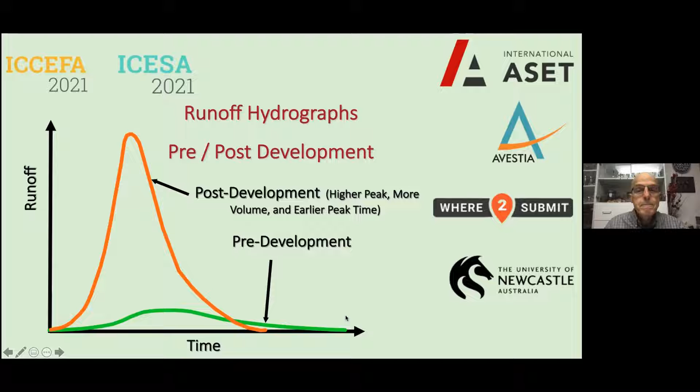In addition, the surface runoff contains wash-off pollutants. The rain isn't that dirty when it falls. There are some chemicals absorbed from the atmosphere, but there are wash-off pollutants that occur. Nutrients from leaves, grass clippings, tree flowers, etc. The cars driving on the roads all have metals, which they lose. When you hit your brakes, you lose a little bit of copper every time you hit your brakes.

When you run your tires over the road, you lose zinc, and as your tires wear, you lose copper. The chromium is on the cars. It comes off, and lead is a legacy pollutant. It's in the soil. It gets on the streets, and we wash it off. And so there are problems with water quality in impervious runoff. You also have petroleum hydrocarbons.

So one example here would be cyanobacteria, which is the cause of harmful algal blooms. Harmful algal blooms can kill your fish, can make your dog sick, even kill your dog, and can give you a pond, a lake, a river that looks really ugly. It's not attractive. So there are problems with nutrients and metals, pollutants in urban runoff.

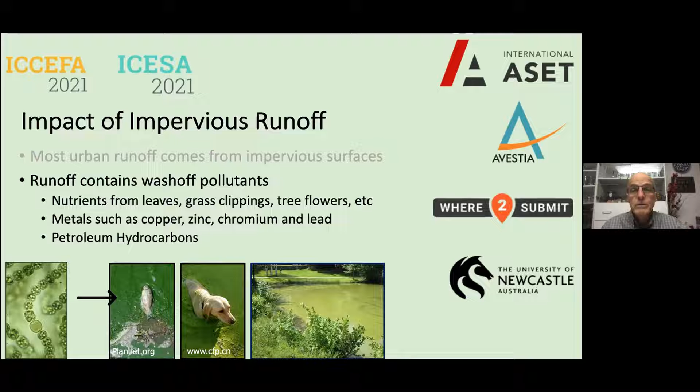And so then you have to get in and you have to make some changes to protect the banks, to do things so that it doesn't meander too much, things like that. And it becomes effort. You have to work at it.

Finally, there's the impact of combined sewer overflows. Most cities that were built over 100 years ago have combined sewers. That means you have sanitary sewer, and that has waste, human waste, and storm sewer together in one pipe.

When it rains, the runoff from the streets and the parking lots and the houses comes so quickly that the system cannot handle that. So you have backup. It backs up into your basements. It backs up into the streets. This is combined sewer overflow.

You can see some of the trash here, which is not the type of trash that you get with surface runoff. This is the type of trash that you have with combined sewers. So you have combined sewer flowing over into the streets, into basements, underground structures. That is not a good thing for human health.

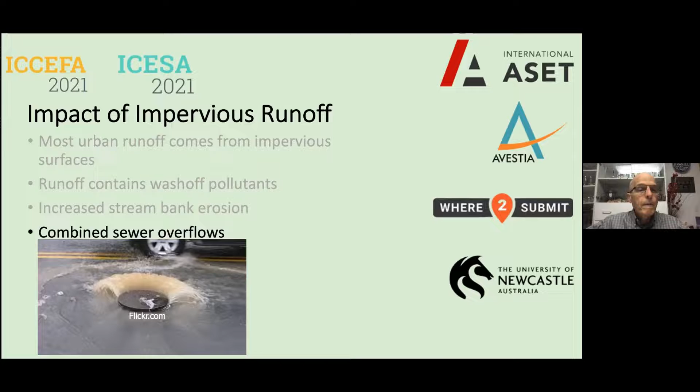So I'd like to shift a little bit and go to the evolution of stormwater technology. The reason is that every region has its own terminology. These are not exactly equivalent, but they're pretty close. So in the United Kingdom, they have sustainable urban drainage systems, and these are stormwater systems that drain the water and do it sustainably. So that would be infiltration basins, filtration basins, ponds, all these things are sustainable urban drainage systems.

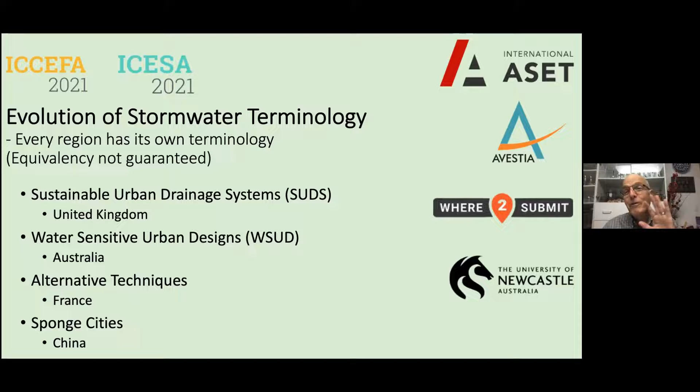In Australia, they developed a term for a similar type item, but they call it water sensitive urban designs, or WSUD. In France, they call these alternative techniques. In China, they call them sponge cities. Sponge cities is primarily about infiltration practices, which is similar to low impact development in the United States. Now in the United States, we can't have one term. We have 5 terms in the United States.

We started off with stormwater best management practices, or BMPs. That's all infrastructure used to treat quantity and quality of stormwater. Now, the problem with BMPs is that it is a management term. It's not a stormwater term. It's not an engineering term. It's a management term. So there are lots of BMPs in the world because management of the world economy is basically how the economy runs. So they developed low impact development, which is primarily evapotranspiration and infiltration, similar to sponge cities.

In 2008, the National Research Council got together and said, well, BMPs isn't that good of a term. So they started calling it stormwater control measures, or SCMs. Now, most academics are now calling it SCMs, but most practitioners are still talking about BMPs. So we have a dichotomy of expressions.

And then in 2012, the US EPA kind of seized on the term green infrastructure, and they related it to stormwater. So green infrastructure was originally related to stormwater, but it's become an ecological framework for social, economic, and environmental health. So it's kind of a broad term. So we are starting to talk about green stormwater infrastructure. And that's what I'll be talking about. That will be stormwater infrastructure that relates to social, economic, and environmental health.

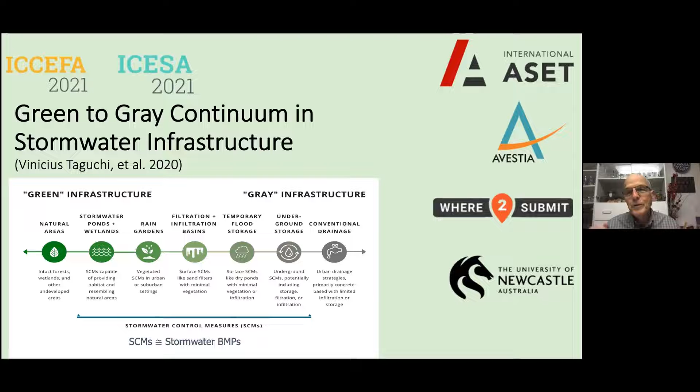And then on the far right, we have underground storage. Underground storage would be underground stormwater BMPs or SCMs, potentially storing water, infiltrating water. Permeable pavement would be underground storage because you're infiltrating the water into an underground area. So that would be the far right. And then finally, we have conventional drainage. So that's the green to gray infrastructure continuum that we have developed for stormwater.

So I would like to move on to the benefits, challenges, and solutions. First of infiltration, then of filtration, and finally we'll talk about benefits, challenges, and risk factors of pond storage. We don't have any solutions as of yet. I'd like to finish with some take-home messages. So what are the benefits of infiltration?

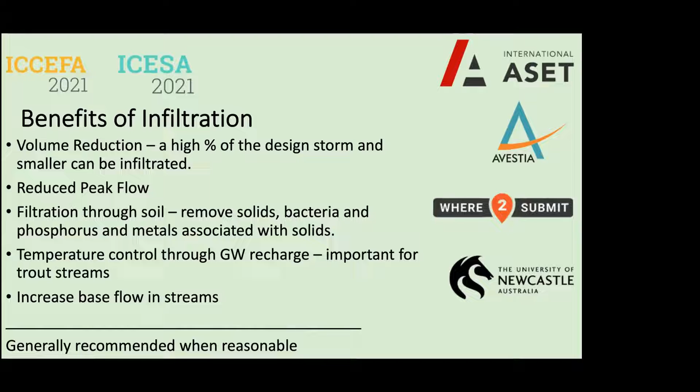Well, infiltration is where you take the water and you put it into the soil, just like it was in nature. So you're getting back towards the runoff, the hydrograph of your previous undeveloped state, the woods, the forest, the prairies. You're trying to get back to that. So you have volume reduction. A high percentage of the design storms and smaller can be infiltrated. You have reduced peak flow.

You have filtration through the soil. The soil will filter most of the solids, a lot of the dissolved contaminants as well. You have temperature control because you're recharging your groundwater and your interflow is much slower. That's important for trout streams. And then finally, you have an increase of base flow, not of the flood flow or the peak flow in streams, but of the base flow.

In some urban streams these days, we have streams that go dry in the summer because we don't have any groundwater flow anymore. We don't have any base flow anymore. And that's a stream that is not a habitat for things like fish, clams. And so we need to get some base flow back into those streams. Infiltration will help that. So infiltration practices are generally recommended when reasonable. Reasonable means, can you infiltrate?

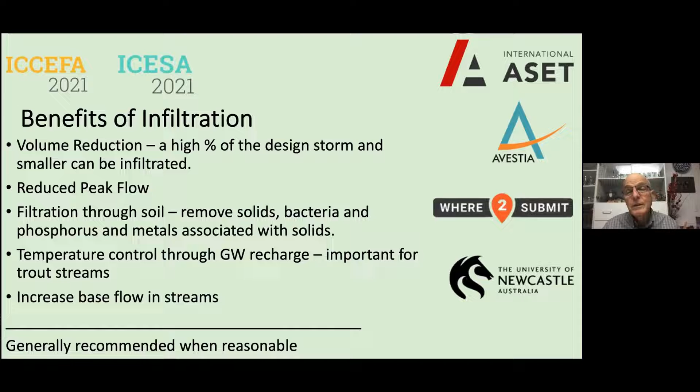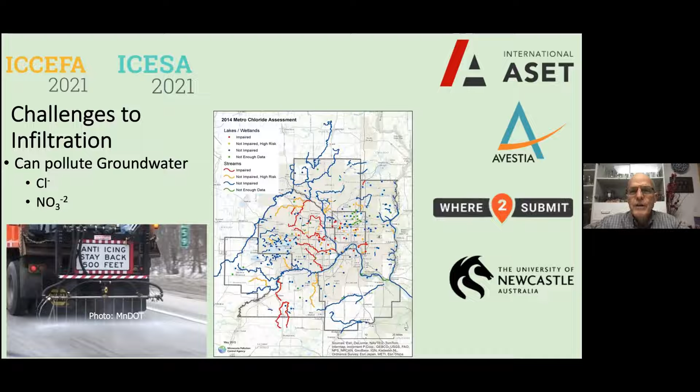There's also the possibility that nitrates will get through. Nitrate is not that significant in urban runoff. It is much more significant in the runoff from agriculture.

Another challenge to infiltration is that they don't always work. From day zero, about 30% of infiltration practices worldwide fail to function. The reason is because of the high spatial variability in infiltration. If you move a distance of about 1 meter, you can get a factor of 100 difference in your infiltration ability. So if you take one measurement of infiltration or one soil core, it tells you virtually nothing about the ability of a practice to infiltrate water.

So what we need is a lot of measurements. We need expertise in soil profiling. It's not easy to design an infiltration basin because you need to be a soil profiler and you need to have a lot of measurements. And then you need some statistics to make sense of those measurements. And you also need a different kind of excavation and grading. You can't just build an infiltration basin like you would a parking lot. One good way to decrease the infiltration significantly in an infiltration basin is to run a tractor over it with a front end loader, carrying some soil.

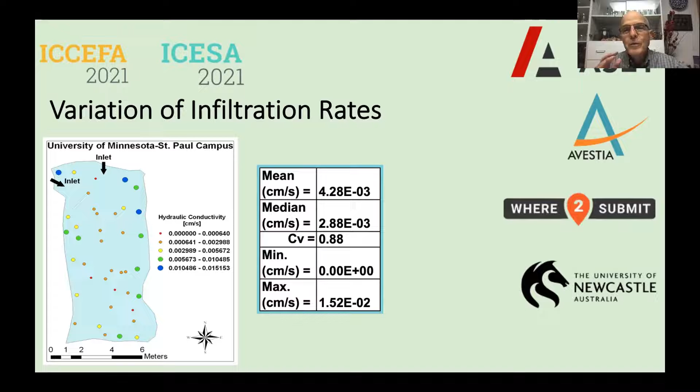You have to calculate the mean, calculate the median, and do the geometric mean. The geometric mean and the arithmetic mean between them will tell you how quickly the practice will infiltrate water.

So we used these devices to look at infiltration in drainage ditches, grass drainage ditches, which are basically grass swales. There's really no difference between them. A drainage ditch, if it's growing grass, it'll infiltrate water. And so we installed a bunch of these in here and measured infiltration rates. We found that these drainage ditches, or these swales, were very successful at infiltrating water, except where you have high groundwater. When you have high groundwater, it's difficult to infiltrate into the ground to empty the swale, just because the groundwater will hold you back.

But the main reason is that you have plants. They keep the pores open. And the plants require minimal maintenance. You have to mow it, and you have to clean up the trash. That's all you have to do. And you can go away and you can leave your swales, you can leave your infiltration basins, just mow it every now and then and clean up the trash. You don't have to do any other messing around with it.

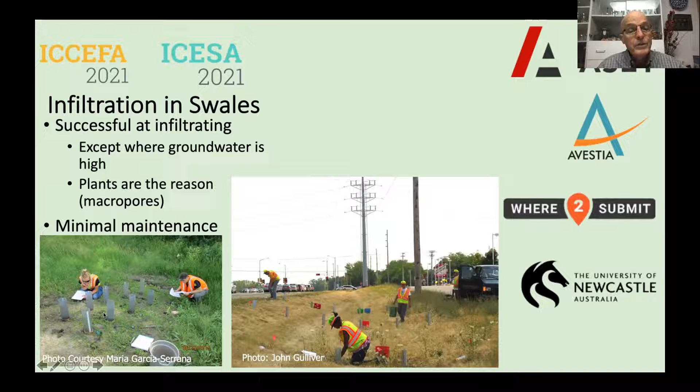Here in this swale, we measured 104 infiltration measurements. And this was a research project. We measured 104 infiltration measurements in a day and a half. Here we took 10 infiltration measurements in a very small section to determine what happens in this small section.

So here's an example of swales and the influence of plants. We have 4 swales next to different highways. What we did is we measured the soil texture. We took a soil core. We looked at the soil texture. We have a loam and a sandy loam, a loamy sand and a sandy loam, a loam and a sandy clay loam.

Now, there's something called the hydrologic soil group based upon the soil texture. The hydrologic soil group tells you if you have A soil, B soil, C soils, or D soils. The A has really good infiltration, that'd be the sand. The D has very poor infiltration, those would be the clays. And B and C are somewhere in between. In this case, we had a hydrologic soil group based on soil texture of B, not A, of B. We had 2 A soil textures and a C soil texture down here.

When we measured the saturated hydraulic conductivity, we took a lot of measurements. We measured how well the infiltration for the practice would be. We got fairly high infiltration rates. These are centimeters per hour. This is the saturated hydraulic conductivity, the most important parameter in infiltration. Anyway, we had 3.5 centimeters per hour, 5.7, 4.1. These are all A soils based upon the KSAT. We had 4 A soils, even though we should have had, based upon the soil texture, a B soil and a C soil. So these 4 A soils are the influence of the plants.

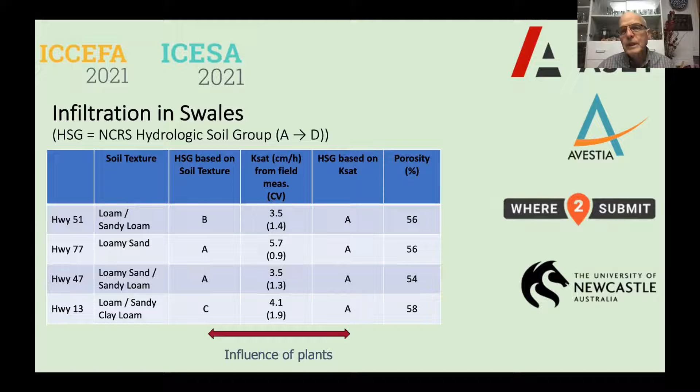So that's the benefits of infiltration practices. There are many benefits. The problem is that 30% of our infiltration practices, we build them, and 30% of them do not function from day one. That's a big problem. We need to take care of that problem. We need to get better at building infiltration practices.

So let's talk about the benefits of filtration practices. There are fewer benefits of filtration practices, but filtration practices filter water by improving the water quality.

And improve the water quality by filtering particles. One challenge is it doesn't have the multiple benefits of infiltration. It only has a small reduction in peak flow. It has no volume reduction. It has minimal temperature control, and the base flow in streams does not increase.

So filtration practices are ones where you filter the water, but you don't infiltrate it into the soil. You filter the water at a location where you cannot infiltrate because of wellhead protection or really tight soils. And so then you filter it and then put it back into the storm sewer or into your receiving water body.

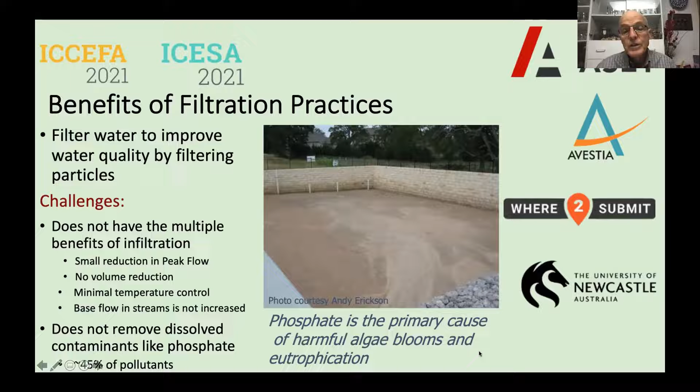And one problem is that filtration does not remove dissolved contaminants like phosphate. Roughly 45% of the pollutants are dissolved: the metals, the phosphorus, the nitrogen. Phosphate, for example, is a primary cause of harmful algal blooms and eutrophication. So it's something that we want to deal with.

So this is a partial solution to the phosphate retention problem. We developed an iron-enhanced sand filter to remove the dissolved phosphate in addition to the particles. Phosphate is the primary form of the dissolved phosphorus in the flow. So we put in 5 to 10% iron filings, 95 to 90% sand. The iron filings will oxidize, they'll basically rust, and then they'll capture the phosphate. A retention of 70 to 90% of the phosphate when designed and maintained properly is possible and actually feasible.

So this is what one looks like. This is a filtration basin. It's filled with water. It goes down through the iron enhanced sand into a drain tile and out into the storm sewer or the receiving water body.

We also have developed a compost amended sand to grow plants. The iron enhanced sand doesn't grow plants very well because the iron grabs all the phosphorus, and plants need phosphorus to grow. But if you put compost amended sand on top of the iron enhanced sand, it will grow the plants.

The problem is that compost releases phosphorus because it's decaying natural organic material. So the iron enhanced sand underneath it will capture the phosphorus released by the compost and the phosphorus in the water coming in to the rain garden. And then you have a gravel subbase and underdrain. It goes into the underdrain and out, similar to what we have above.

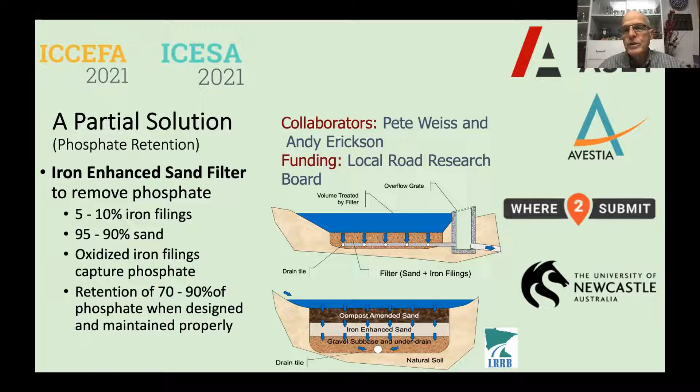There are 170 iron enhanced sand filtrations installed in the upper Midwest, and we feel very grateful for that. We feel that they are a good practice that will be moving throughout the world.

So let's move on to talk about stormwater ponds. Stormwater ponds are very successful in that they settle particulates and associated pollutants. They also convert dissolved phosphorus and dissolved nitrogen to particulate phosphorus and particulate nitrogen because the algae grows in the ponds. The algae grab dissolved phosphorus and turn it into particulate, organic phosphorus. And they provide a wildlife habitat, and they are seen as an amenity in many urban neighborhoods.

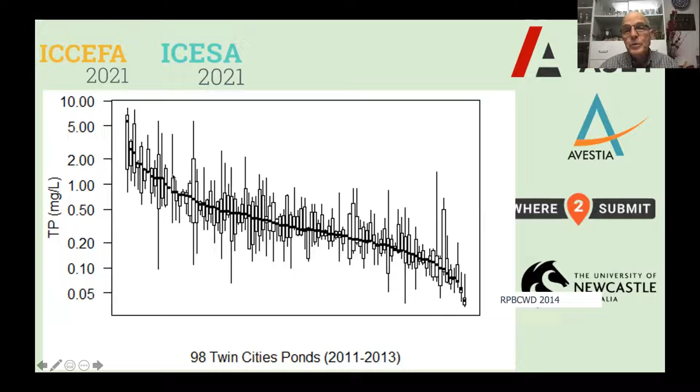Now, a pond should have lower phosphorus than what comes into it because what comes in typically settles, right? It settles in the pond, and so you have a phosphate concentration in the pond that's lower than the water coming in. We didn't think that this water coming in had 6 milligrams per liter. So let's take a look. And here's what we found.

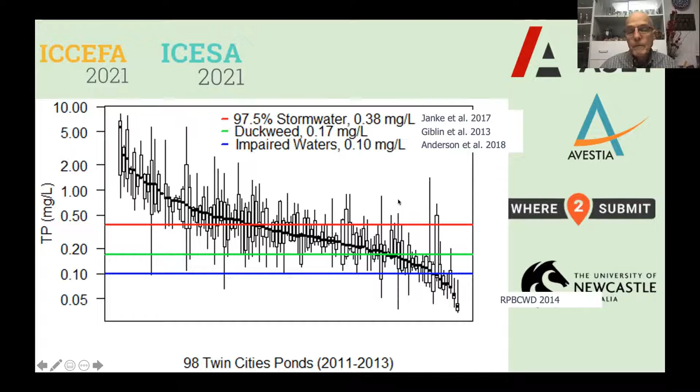So we started taking a look at it, and we discovered some things. The first thing we discovered is that ponds are highly stratified. They stratify at 30 centimeters of depth, not like a lake. A lake stratifies at 3 to 5 meters of depth, even a small lake. A large lake, it would be 10 meters of depth. Ponds are stratified at 30 centimeters of depth. That's phenomenal.

And it is something that we never planned when we first started building ponds. They were saying, well, ponds are going to be well mixed because they're shallow. They're typically 1 meter to 2 meters deep. But they're stratified at 30 centimeters of depth. So that means they're highly stratified. The top of the pond is exposed to the atmosphere, which has all the oxygen. The bottom of the pond is exposed to the sediments, which have a tremendous oxygen demand.

And the reason they have a tremendous oxygen demand is because of all the material that has settled over the years down to the bottom of that pond, and now is demanding oxygen to degrade it. The bacteria down there are demanding oxygen. So there's a tremendous sediment oxygen demand in the bottom of the pond, and the pond is losing oxygen very quickly until you have virtually zero oxygen in the bottom. So the top has oxygen in it, the bottom does not. You have a low oxygen system.

Low oxygen systems result in sediment phosphate release. So the phosphate that's stored in those sediments, that's buried in those sediments, is being released back into the pond. That's why these ponds have high phosphate and phosphorus concentrations.

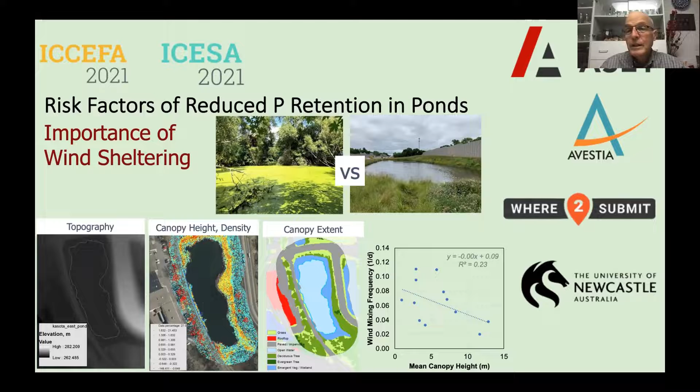And so we did a study with the topography, canopy height, the canopy extent, and we got a wind mixing frequency versus canopy height. We found a relationship between them. When you have a larger canopy height, you have a lower wind mixing frequency. So there is a relationship here. There are lots of other factors, and that's why the R squared is so low, but this is generally overall a significant finding.

We also documented phosphate release due to low DO near the bottom. We took some sediment cores out of the lake. We took some water out of the lake with the sediment cores. We put them in the lab. We allowed the dissolved oxygen to go towards zero. And we measured the phosphate release from the bottom. We found that some ponds did not have very high phosphorus release. And those are the ponds that were mixed most of the time, but some ponds did have high phosphorus release.

So the question is what to do about these ponds. Well, there are some things that we've been thinking about. The first two would be to stop phosphorus release, to not deal with mixing, to not deal with the stratification. We'll have the stratification and just stop the phosphorus release. You can treat them with alum like you do for lakes to stop phosphorus release. We can also treat them with iron filings. These are things that need research because they really haven't been done in ponds.

The third item is to increase pond mixing. You can increase pond mixing by doing things like cutting down the trees. That would increase pond mixing, or you could aerate the bottom with an aerator primarily designed to increase the mixing, not to actually add oxygen to the water. And then there's low level withdrawal, where you pull the water out of the bottom before it reaches low dissolved oxygen concentrations instead of the top. And finally, there's dredging. All of these need research.

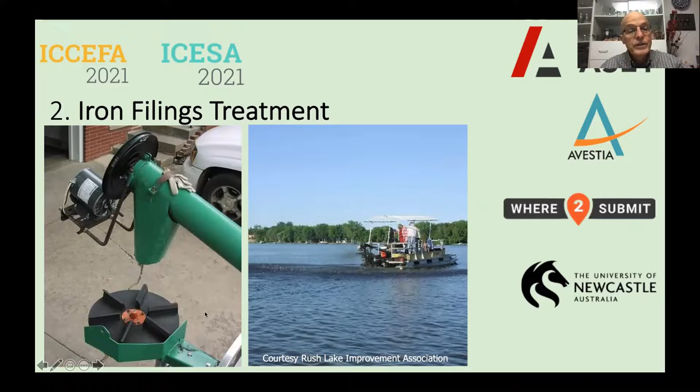The other item that is about mixing is wind mixing. Now, we had an idea that you could expose the surface to wind mixing by cutting down some of the trees, not all the trees. You cut some pathways through that could create some mixing.

In addition, what you could do in these pathways, you could put pollinator habitat, some small bushes, some smaller lower plants, so that you can pollinate. The bees could be there, butterflies could be there, that type of thing. You have more of an environment where many things could grow, many things could live. That's the idea.

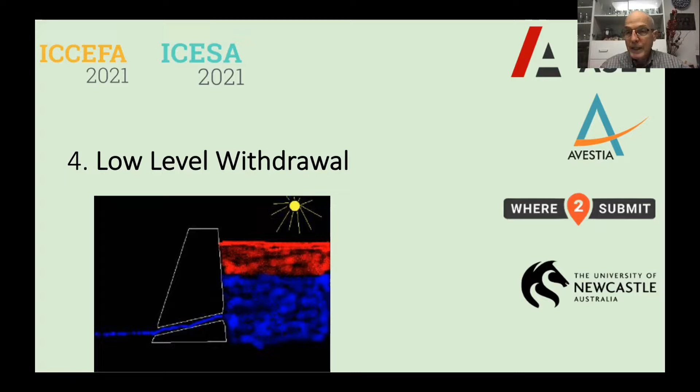And the fifth option is to investigate what happens when you dredge a pond. Do you make it so that the pond does not release phosphorus? No one knows. No one has really looked into this. Dredging is usually done to free up the pond when it's impeding inflow into the pond. That's really when it's done. It's not done to take care of phosphorus release from the bottom sediments. We need to investigate how well dredging will take care of bottom release of pond phosphorus.

So I have some take-home messages. The first is that infiltration has many benefits. I'm a big advocate for infiltration when you can infiltrate. And you can infiltrate in many C soils because of the plants. When you get a C soil, that was one of the soils that we had in our study on swales. When you get a C soil, just see if it'll infiltrate something.

If it won't infiltrate something, you put an underdrain in it, you cap the underdrain, and then when it does not infiltrate very well, you just open the underdrain up and let it go into the storm sewer. That's how to deal with infiltration when you can.

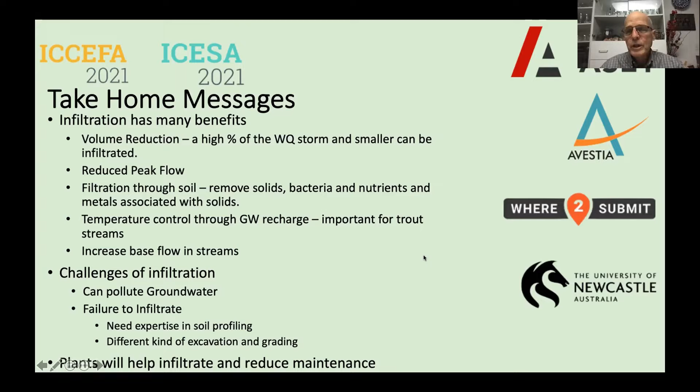The challenges are you can pollute the groundwater, especially if you're in a region where you're putting chloride on the ground, onto the streets, parking lots. And the failure to infiltrate is a big challenge. Need to know something about the soil. And plants will help for infiltration.

Another take-home message is that filtration is very good at retaining particles. It does not have the numerous advantages of infiltration, but you need to help prevent clogging, you need to reduce clogging, and you need to retain dissolved contaminants, and things like iron filings can help you do that.

Third take-home message is that we need to look after our stormwater ponds. We've ignored our stormwater ponds for too long. Many are stratified and releasing phosphate back into the water column, back into the receiving water body. Wind sheltering will result in more stratified days, and the solutions are currently being researched, but these systems are complex. So the solutions will take time and effort, and we may have a different solution for different ponds.